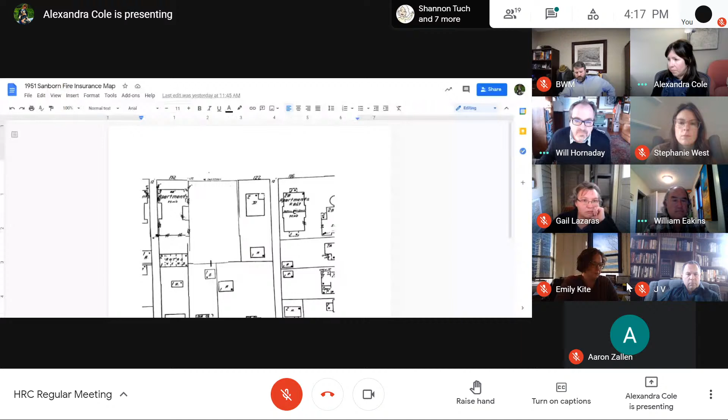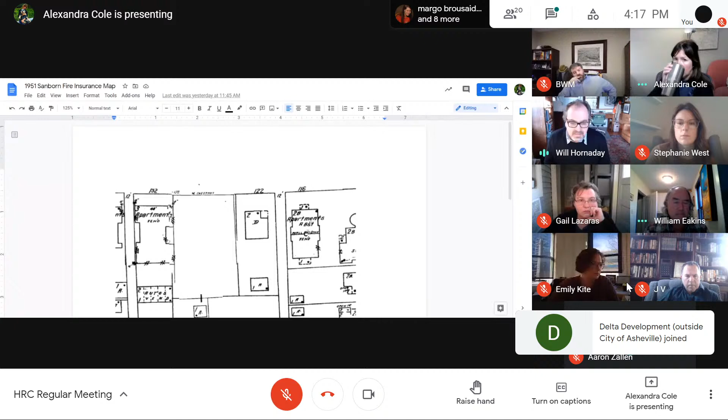Also, last time you had the Sanborn map showing the original location of the ADU and the one-story ADU. Do you have that on this? Yes, I thought I added it to the folder, it might be number 9. I don't think I added it to the presentation since we looked at it last time, but let me pull it up. It's not exactly in the same place, but it looks like the footprint on the Sanborn maps - it's not like they were 100% accurate - but there is that footing in the backyard. Yeah, you can see it. Can you see that, or should I zoom in? Yeah, I see it, okay. And that's about where that footing is in the backyard. Right, okay.

Any other questions? Alex, that perspective photo that you had... Sorry, you wanted to see that again? Is that what you said? Okay.

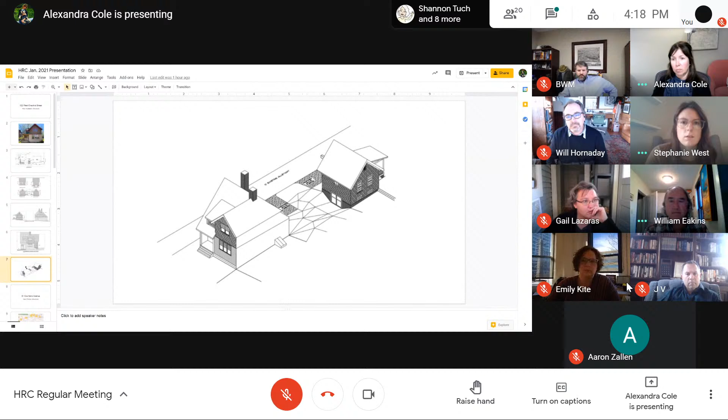Does it say the height of the rear building? I saw it in here. So it's just from the ground level, so 27 feet, but that is not measuring from where you see the doors, where that would be dug out. It's not including that dimension. So I don't know, I'm just eyeballing that - it probably looks like, I don't know, 5 feet maybe, but I'll let Kenny, the applicant, speak to that. Cool, thank you. Sure.

Commissioners, are there other questions for Alex at the moment?

We can get some additional information. I understood the square footage to be 68% or so of the main structure. Was that correct?

Yes, that was based on the property card square footage calculation for the primary structure. When I talked to the applicant earlier in the week, he let me know he had measured the building and said it was closer to 1,600 square feet. That would bring it down a little bit, but still not anywhere close if you're using 30% as a calculation. Based on square footage, it still wouldn't get it close. That's what I was alluding to, making sure the math was not even close with the revised square footage of the house. Yeah, I'll pull out my calculator and do the math for you.

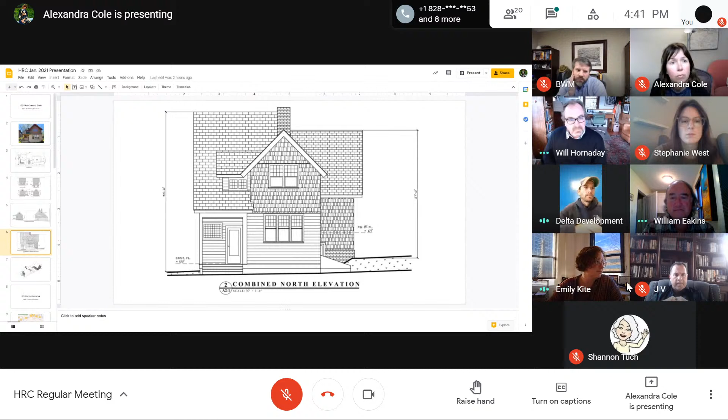Alex, back up to slide 3, please. So that existing - I'm using my cursor, which you can't see. But Alex, could you show where that foundation is? Sorry, I just realized I was muted.

It's a little bit hard to compare side to side. Unfortunately, I wish we were in the North Conference room and I could put these up together. But if you're looking at the Sanborn map, it looks like it's definitely shifted over so that it's fully behind the primary structure, which would probably help a lot.

Kenny, I don't know if that's possible. You would probably have to reconfigure the parking a little bit. Oh sorry, that's okay, we wouldn't have to move the parking. It seems like - if that's what he's saying, towards the alley, then it shouldn't be too much of an issue. It's only a couple feet.

Yeah, it might help it a lot. I do agree with Will, and that was sort of why I pulled this slide up - it is really competing in a big way. If you're looking at how simplified the primary structure is - obviously this is kind of a funky view because you're looking up at the house - but if you're standing in the middle of the street looking straight at this house, you see now the accessory structure extending out beyond the side elevation, and it appears very large.

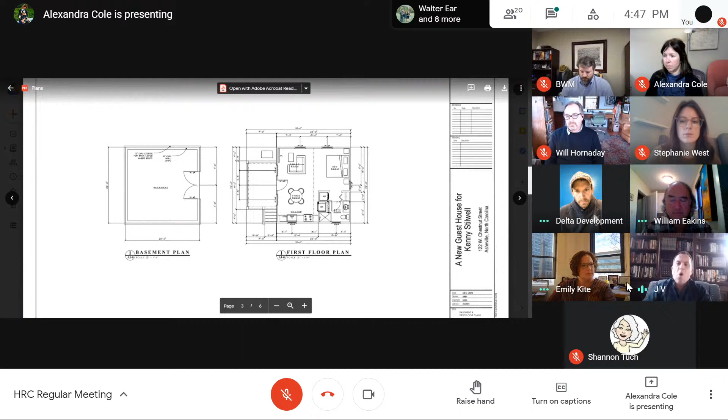If I can ask a quick question, I'm one of the new guys, so Ms. Kite, you'll cut me off if I'm not allowed. What is your intent for the use of the space above ground, not in the basement? I'm gathering, and Will Hornaday helped clarify, the concern seemed to be the height of the building, since the accessory building is seen from the street, and the width. If tucking it behind helps, would you be allowed to expand more underground? Is that what your use space is, or is it just living space where you're obviously wanting sunlight and all this stuff? Helping me get a sense of how you want to use that looks like a living space might help us in deciding things like lowering the roof level and other things that help get to the scale of the building. This is part of my learning curve, so any of the longtime members can jump in and correct me.

Yeah, my intent for the lower portion would just be storage. But the space above ground that we would be seeing from the street and from the alley, it's what we see here — it looks like it's a living structure, a living unit. Yeah, that would be the living space for my friends and family to stay in when they come to visit.

Okay, well that didn't help. Yeah, it's a 1,600 square foot house. I have 2 kids and a wife, and it's enough space for us, but I'm from Michigan, I have family, and I currently live in Florida, so we have people visiting — we'll probably have people visiting from both directions.

So I just want an extra space for people to stay. So the space you're needing, whether it's taller or longer or wider, you're sort of agnostic to, because you're looking for a purpose. Whereas if we can find your purpose and meet the scale concerns that have been expressed, you'd be amenable to that. So it's a matter of saying, can we find the space you need that meets the configuration and confines of what they need?

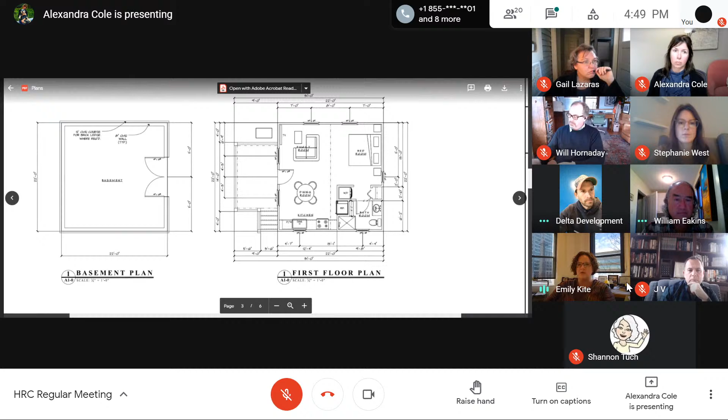I want to talk a little bit about the windows. I think one of my concerns about the windows may go away, Kenny, as you consider an option that puts the basement fully underground. We've got these basement windows along the transition between the brick and the siding, and I don't see that as a detail coming through from the main house — it starts to read taller for me, and doesn't do much to mask the fact that there's a basement, in terms of the scale and massing of the house.

I think maybe that problem solves itself if you propose that the basement push into the ground a little bit, because I don't see those same windows showing up on the main structure, and it starts to suggest a multi-story building, which leaps to a bigger mass when we're looking at multi-story structures. So I think you might give some consideration to how important those windows are and whether they're really consistent with the house.

I know, Alex, you had some other concerns about the windows and how we could better connect the style of the windows from the main house with this structure. It's not really a house, but I'd be interested in making sure that, Kenny, you get the feedback from us that you're looking for with regards to windows and some suggestions about how we might feel if other window configurations might be proposed moving forward.

Definitely to that. My only other concern would be egress. I don't know what windows would be necessary in the basement, maybe if they're below grade and you can't see them, with a window well or something. I wouldn't think you'd want to lose them all. I think you'd want to have some form of egress.

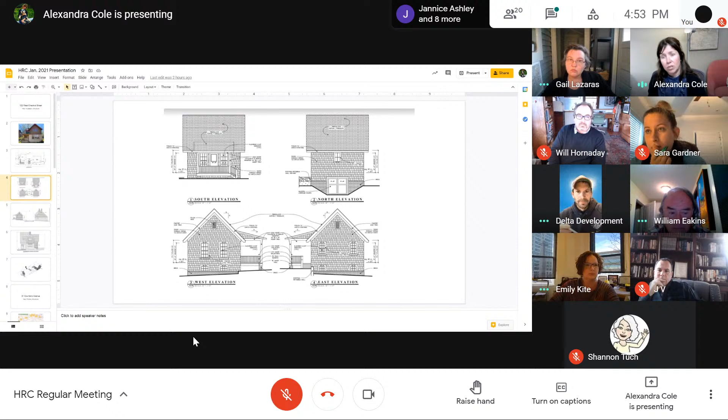We could make it a condition on the approval, Kenny, that you follow up with staff once you've decided on the paint palette. I would mention that the resubmittal deadline is next Wednesday, so it's a pretty quick turnaround. I don't know if you can get it together between now and next Wednesday, but great.

We'll welcome you at the February meeting, but if you feel like you need more time, you might want to consider March. Just throwing that out there. Okay, and can I notify you this Friday or Monday about that if I need an extension? Yeah, that's okay. If you don't know today, we'll just have you request to continue to February, and then we can follow up if you need to change it to March.

Okay, and just real quick, I want to revisit the porch just one more time, if we could. If we take away the posts and handrails and things like that, and just maybe do like a bracketed roof over, would that be more pleasing for the commission?

From my perspective, I think anything that reduces the scale of it and sort of downplays the focus of it is certainly worth considering. I could appreciate the need for a covered entry, and I think anything that can happen that sort of minimizes that roof line and the footprint and the scale of it is certainly going to improve the overall massing of the structure itself. Okay, all right, thank you.

Gail, you've got comments? I do have kind of a comment/question for my fellow commissioners. So looking at the standards under carriage houses, garages, and accessory structures, the bottom line is that the overall feeling of those accessory structures is that they're modest and take second fiddle to the home, clearly. I just wanted to ask the architects on the group or anybody else that has an opinion. I understand that the large high pitch roof, the intent was to echo the front building, the main building. What are your thoughts on lowering that pitch, on making it so that it doesn't echo that front building? Because to me, that's a huge part of that visual hit from the street. I was just curious what you all felt about that.

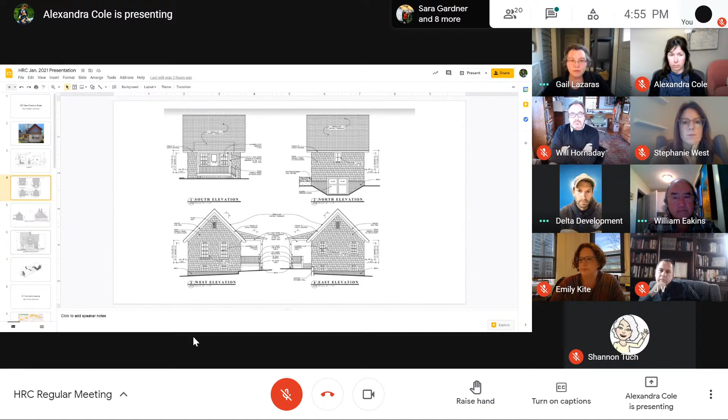I think from my perspective, it'd be an interesting study to do. I think it's going to be a bigger distraction visually if the pitch is different, that's the challenge. And if the constant is matching the pitch of the roof, the only solution to shorten is either make it narrower. The proportion right now is square.

A rectangular proportion, which I think is more in line with the Sanborn footprint, would also bring the ridge of that roof line down if it weren't as square a footprint as it is now. That's one strategy. Lowering the bearing line of the eaves is an option, but at that point you get to a place where the ceilings start to become unmanageable.

So I think it would be potentially more distracting in terms of congruity with the main structure if the pitch was different. But I think there are some geometry things that could be considered that might help without giving much up in terms of square footage, because that's not the only metric we use to evaluate, that could reduce the overall height of the structure in comparison to the existing house.

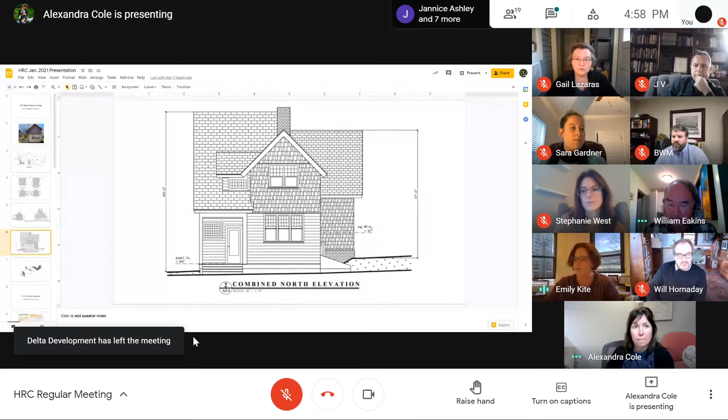And we are in the agenda moving forward to items of new business. Alex, do we need to entertain a motion to continue the 250 Montford Avenue application?

Yes. Okay, I move we continue 250 Montford Avenue to the February 10, 2021 meeting. Thank you. Second, Mitchell. And that was Commissioner Mitchell on the second on that. Correct. Okay, we'll vote again by roll call.

Vice Chair Eakins, aye. Commissioner Brusades, aye. Commissioner Gardner, aye. Commissioner Hornaday, aye. Commissioner Lazaras, aye. Commissioner Mitchell, aye. Commissioner West, aye. Commissioner Vaughn, aye. Myself, aye as well. That motion also carries.

Moving on to the next application, 81 Courtland Avenue, also in the Montford Historic District. I'm going to let Alex get us all up to speed on this application. Thank you, Chair Kite. So this application is for construction of a new primary structure on Courtland Avenue.

I included a site map just to orient everyone. These lots were newly subdivided last year, I believe, one of the first subdivisions the commission considered. So these lots are a little bit tricky because they're kind of in this, you can see, it's a little bit of a bowl. If you've driven around from Houston Street around on Courtland, you can see down into this property.

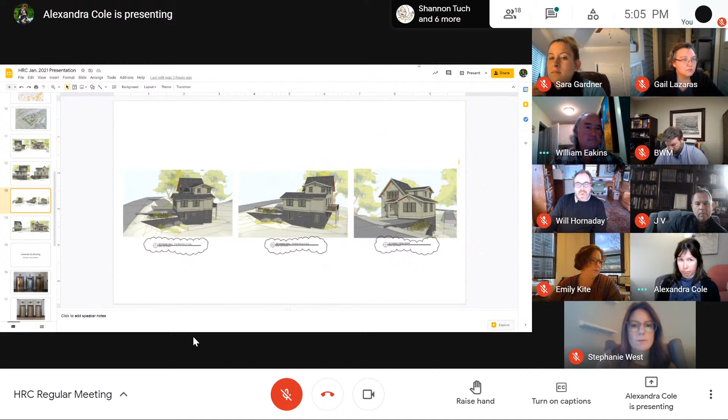Alex, the correct square footage is 2765? 2701, thanks. Sure, it got reduced a little bit obviously with that reduction of the length of the L. So to change that around, hopefully I got everything right. I was making a lot of last minute changes today.

Are there other questions at this time for Alex?

Okay, at this point I'm going to invite the applicant to provide any additional information you'd like the commission to consider. Mr. Zallen, I presume you're here. I am, thank you, hi everyone. Can everybody hear me okay? Yes, great.

So is the floor open just to make commentary, or do you want to solicit questions first, or how would you like to proceed? If there's anything you'd like to add, we can respond with questions at this point. But if there's anything in response to things Alex has mentioned, or anything you'd like us to know before we dive into questions, that would be appropriate. Okay, that'd be great, thank you.

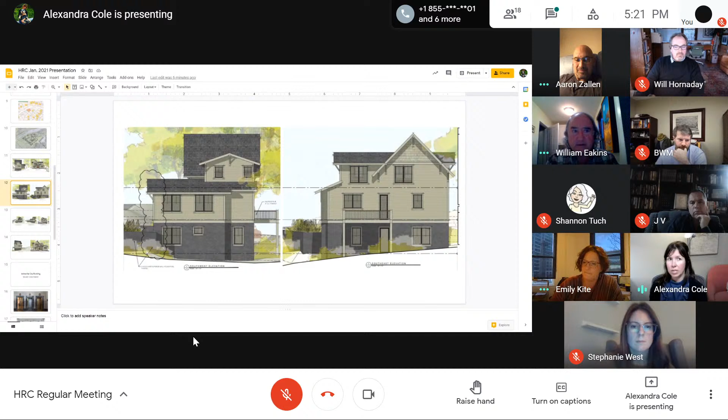Hey Alex, what are the square footages of the neighboring houses to this property? There's not anything around this house. There's this little one at 4 Houston Street, a non-contributing structure. I can pull up the property card for that one, but it's a little one-story, not a ranch, but kind of between a cottage and a ranch. This is outside of the district once you go farther southwest on Courtland, so there's not really any kind of context to tie it to from a square footage standpoint.

I didn't think in terms of the overall square footage that it was inappropriate, especially because of the way it was designed from the street perspective level. It's not overwhelming from the front elevation. It is pretty big, and it does have that finished basement if you're looking at it from the rear, which you will see from Houston Street until these other lots are built on. But from my point of view, it seems like a sympathetic addition in the neighborhood, in that fringe area, knowing that area of the neighborhood pretty well.

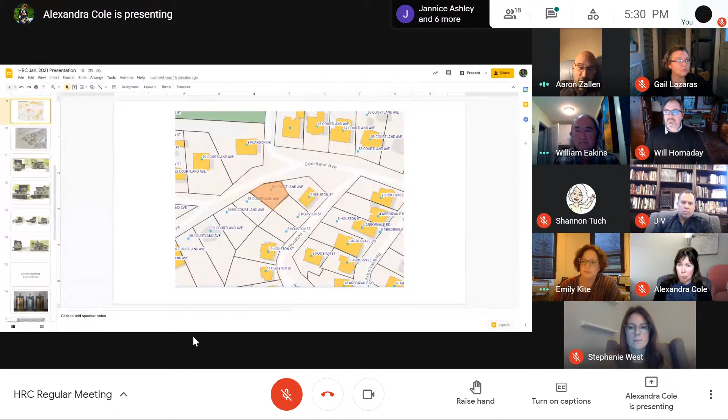The upper part of the lot is where we originally decided to move, which would have put the parking on the side of the lower end, where the existing structure is, on the lower side of Houston. It was so steep and untenable that you couldn't even do it. So I had to move the building to the opposite side, which makes the foundation a little more untenable. It's sort of like pushing on a balloon—you push one side and something else pops out the other side.

So we've endeavored to put the parking on the upper side, towards the confluence of Courtland and Houston, on the other side of that lot. We've succeeded in doing that while minimizing a retaining wall, which would be probably a couple feet. That's at least the preliminary plan as it exists today, just to give you some perspective.

I think the feedback we've heard regarding the parking is consideration of using other materials to make it less impervious and soften it to some extent. There's been one suggestion for abandoning the front yard parking in favor of on-street parking on Courtland as a way to meet the guidelines. We've not heard a great deal of support for leaving the parking how it is.

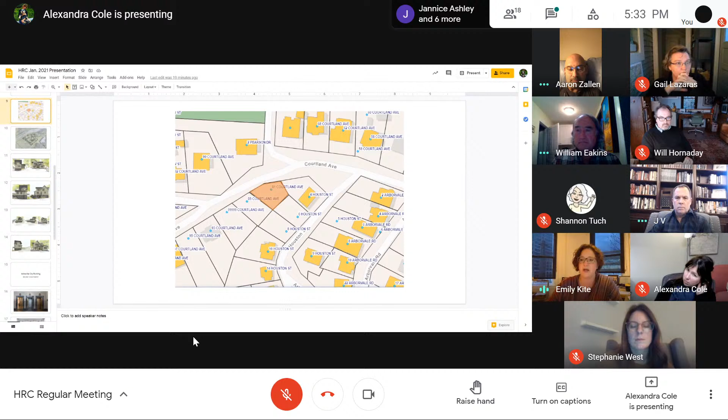We've also not really talked about the massing of the house, or the style or look of the house. Gail, I appreciate your description of that—I do think it's a nice solution. I like the scale of the front of the house, that it's not quite as big as it appears from the back. I think the scale is appropriate in the front for the district, and as a design solution, the house is a pretty good one. I don't have particular concerns about that. So, as with many applications, it comes down to the parking, which probably, Aaron, was not a particular surprise when you came here. No.

Yeah, I want to be as accommodating, obviously, as possible, and I understand the concern. It's a very gray area, a transition area between what you consider proper and not. So I'm really cognizant of that and mindful of that.

I think at this point, the options for you are to amend your application today to reflect some of the changes we've suggested. I don't know that the commission's given us a strong sense of one solution over the other. The other option would be to request a continuance and give yourself and your designer some opportunity to consider in more detail some of the feedback you've gotten today and come back with a proposed change to the solution you've presented.

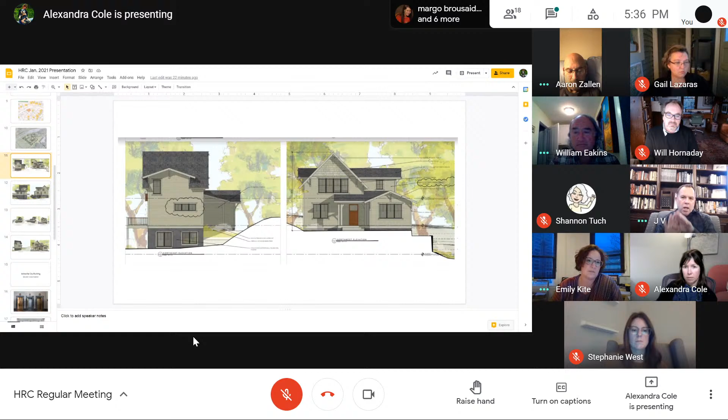And I understand we don't want to park along here, and then you try to get trucks through, try to get other cars - it is a nightmare on Childs Avenue. So my soapbox is always going to be, when it comes to off-street parking, take into consideration the neighbors and the other people who have to try and get through these neighborhoods. Off my soapbox. Thanks.

One solution that people in that vicinity use, and other places in Asheville, is more like a street widening, where the cars are still parked on the side of the road, but on the property, on the right of way, sort of, that's created. If you go further down that street, you can see where other folks have used that, which is a bit of a compromise between a full pull-in straight driveway that takes up the whole front yard, and a way to minimize that wide appearance in the front of the building as part of the entry. I don't know, it's just a thought I had - not sure if it would actually work.

I would be open to that as well. It looks like the one Alex has up now creates almost like an extended apron, though, that goes almost the length of the house.

So I would just add, going back to what Shannon said, parking isn't allowed in the front setback - I'm not sure how that was created, so that actually isn't an option. Right now you're cutting it close. We did send your site plan to our development services staff to see whether they could approve this from a zoning perspective, and I think it would probably be okay, but pretty close to what they would not allow. So I don't think they would let you do what Gail is describing, although I'm sure there are plenty of places where that exists, where it just didn't get an approval or is old and has been there for a while.

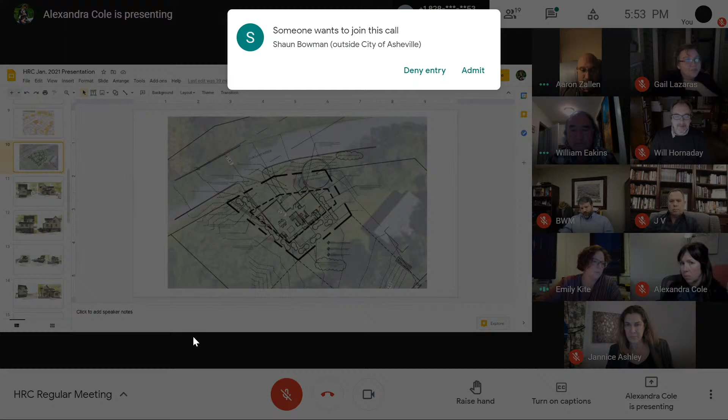In that location with that topography, with appropriate landscaping that might mitigate the visibility of the retaining wall and so on, it would certainly be something I'd consider. Okay, strongly.

The conversation with Aaron Zallen, the architect, was that the retaining wall would be quite high, on the order of 10 feet potentially. Obviously you need to be careful with the pitch of the actual driveway itself to try to reduce that retaining wall — nothing over a 20 pitch, because it does slope down, and we know what happens when you get ice or any type of freezing and it slopes down — you end up in the yard.

One last perspective: I would feel comfortable approving on-street only parking and handling this, just for traffic calming, and also bringing this to a head to let the neighbors get involved and know what they think. I don't know, Aaron, if you've spoken with any of your neighbors about this plan, but I'm looking ahead — like Chair Kite was saying about these other Cumberland Circle situations, exactly the same thing, where there's a split-up lot with a very steep drop off the road, and it's going to be really hard to park on it. So I would be fine with on-street parking as this is shown now.

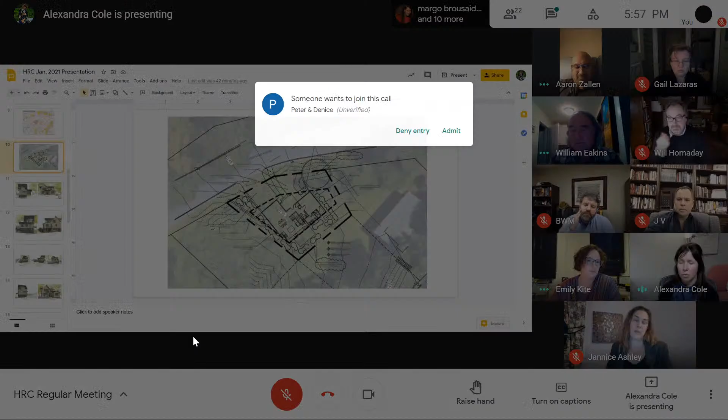I want to go back to a comment you made, Will, about talking with the neighbors. We notice all properties within 200 feet of a subject property for major works, as required by state statute, so all neighbors should have received notice and a link to view plans online. I haven't heard any comments or concerns from neighbors about the proposal, but to be fair, Alex, there is parking shown on the site, and they'd be more concerned if there were only on-street parking.

I've worked with multiple folks around Arborvale, Houston, and Cortland. Generally that area is very tricky with parking, especially at Arborvale. If you go through there, it's one way, but even being one way is a little dodgy, especially from a life safety perspective. So I could see that even if you allow at least one parking space, that's one less car that has to park on the street. I think it's worth the applicant considering some of the suggestions made today that might work, and then seeing what you all think about the solution they arrive upon.

Because I do agree with Jannice, I think that's why the provision in the guidelines exists for when a site has limitations like the steepness of the topography - that's obviously why the guideline was created. So I think you should consider it. It's not ideal, but it's also on the edge of the district, as you all said. It's not in an area where it would obscure other architectural or landscape features. I feel like I could support parking there if it were on the other side, or at least minimized on the southwest side to the extent possible.

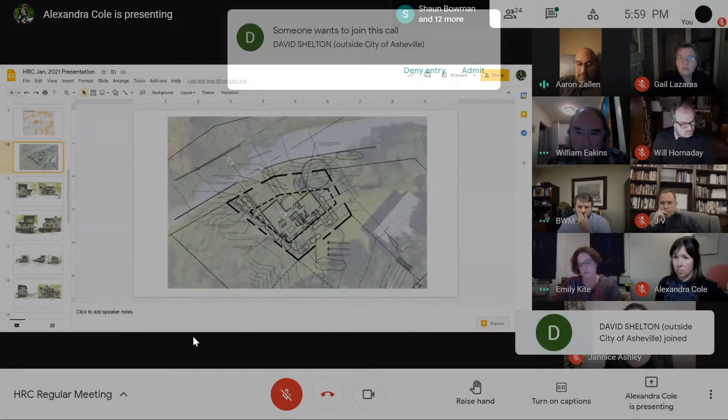I think, Aaron, at this point if you're inclined to consider Alex's suggestion to continue the project, that would be something you'd request from us, and then we'd make a motion around that request. Yeah, absolutely. I understand this is potentially a broader issue than this one property, and I'm sensitive to that, and I understand the precedent nature of it. There are varying opinions and views. I think continuing a month would give the commission time to think about it independently, and when we come back we might have a bifurcated approach that works better. The suggestions everybody made were good ones, so carrying those back and continuing would be something I'd be amenable to.

So are we going to March with this application, or February, sir? I'm sorry, I misheard you. Are you asking to come back in March or February? Oh, February for sure. Alex, what was the deadline for the February meeting? The deadline for resubmittal is next Wednesday. So we have one week, Aaron? That should be plenty, that should be enough time.

Okay, then I move that we continue the 81 Cortlandt Avenue application to the February 10th, 2021 meeting. Second, Mitchell. Roll call vote on this motion. Vice Chair Eakins, aye. Commissioner Mercedes, aye. Commissioner Gardner, aye. Commissioner Hornaday, aye. Commissioner Lazaras, aye. Commissioner Mitchell, aye. Commissioner West, aye. Commissioner Vaughn, aye. Myself, aye as well. That motion carries, and Aaron, we look forward to seeing you again next month.

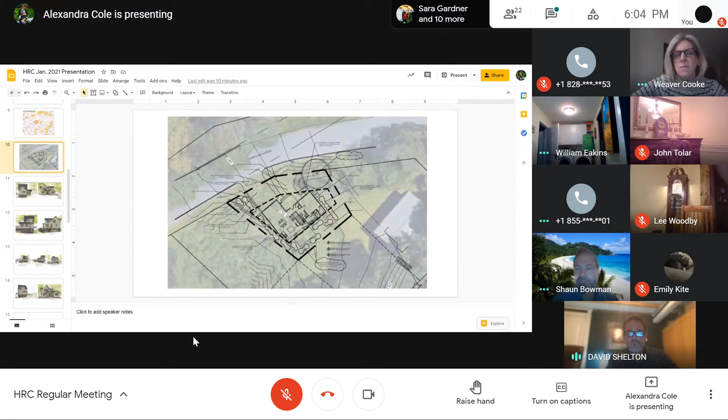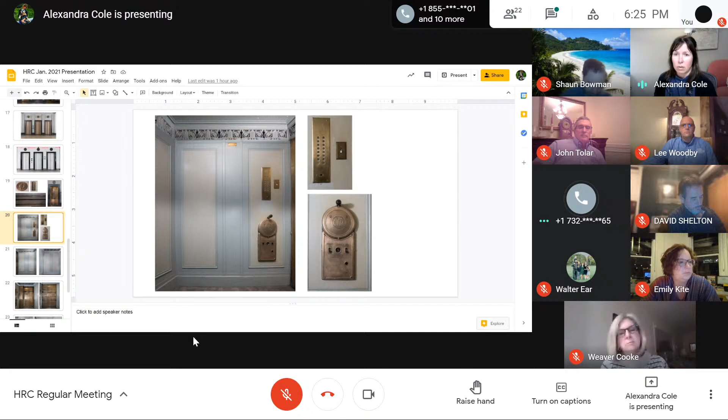So I think if that is somewhat unknown, we need to make sure all of that is verified with staff when it is known, as far as the dimension, how the venting will be cut, and whether there will be a seam here or what that will look like appearance-wise. So I've just included more shots of the interior of the cabs.

The other big change, which is kind of what we suspected, is that the brass gates unfortunately can't be used and meet ADA compliance. We are recommending that, I've noted it as a concern, but at the end of the day, if the commission is comfortable approving an elevator modernization, it's going to come with some small compromises. Given the amount of other features they're able to retain and preserve, I think we kind of have to give a little.

I would add too that I did reach out to the SHPO staff, to Jennifer Cathy, the restoration specialist with their office, to get her courtesy review on the application. She had the same feedback that I did, that overall, if this were a rehabilitation project, the changes being proposed would be acceptable and meet the Secretary of the Interior standards. So I was pleased to get that feedback from her.

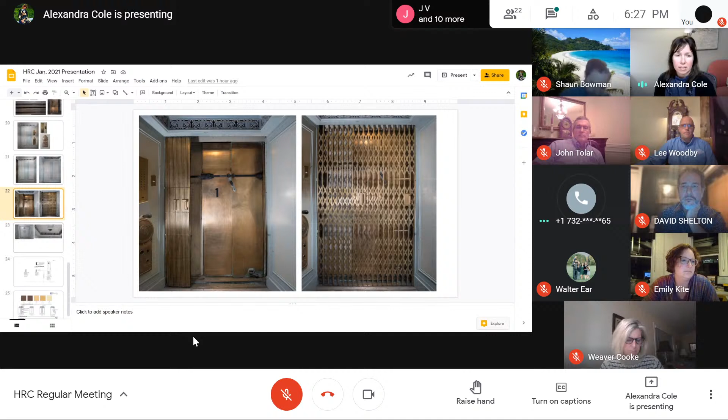I think one of the things we should probably consider today is, if the gates are removed, where do they go? What do we do with them? Surely we don't want them to get lost in some city facility somewhere without some kind of second life. I don't have any great ideas today, but I can ponder it. If you all have any thoughts, I'd be open to them. I know the Capital Projects Department has talked about updating some space on the first floor to perhaps have a newer, updated museum space of some kind, which might be a good place for the gates.

So just a couple of other pictures. The ceiling, this will all be retained, restored, and cleaned up. I just included this little detailed drawing of the dimensions.

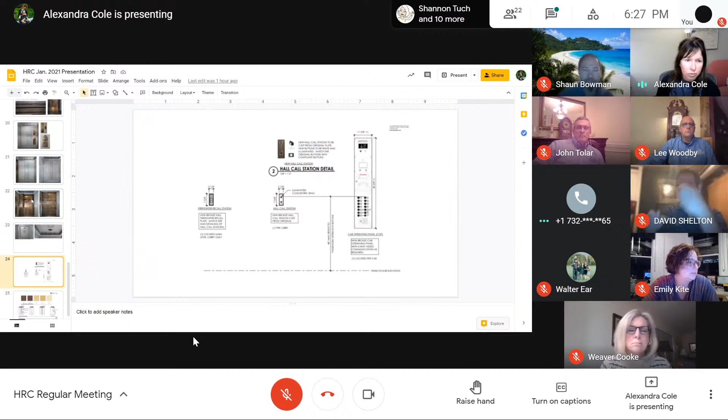That's the other big thing you will notice, is that on the wall here, as you're facing the doors, there will be a new car operating panel. The dimensions of that are estimated here but not known specifically, so I think we would just need to verify that in the field once it is known. But that is how the elevators would be operated.

If you want to read through it, it's in the packet. But ultimately, these were the colors that they considered to be most closely matching the original colors of the elevator cab.

This project also includes repainting the cab interiors, as well as installing new marmoleum or linoleum flooring, which it has now, and that was typical of elevators of this era. At this point the architect has sent me several different types of linoleum and colors, so I think it's just kind of up to this group to make the determination on what the appropriate color for the flooring is.

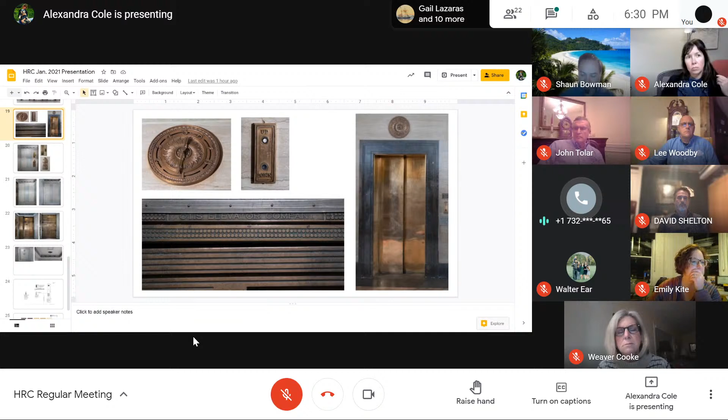If you'd like, I can give you a brief idea of our idea of the decorative venting and how that will change. The idea is essentially finding the right point to remove it, probably doing it symmetrically, so the symmetry still makes sense, but likely just a little off of each end, so the pattern makes good sense.

The new operating panel - the drawing that I have up there would probably be elaborated similarly to the call stations with a small brass border or something to make it sort of fit in. And the intent on what I actually like about the location is retaining everything that was existing, but then the new door wall, essentially, it's there. So what is new houses that, so I think it detracts less from what was there. That's all I wanted to say.

Commissioners, do y'all have any additional questions for Alex at the moment?

Alex, you had said there was a picture of the mail slot. Is that coming out, or why was that in the packet? I think the applicant or the city staff shared with me a packet of photos that were taken at some point, and I'll let Walter Ear from our Capital Projects Department address that. Walter, I was thinking that photo was just in that packet of images, like it's context for original features down there. Is that correct?

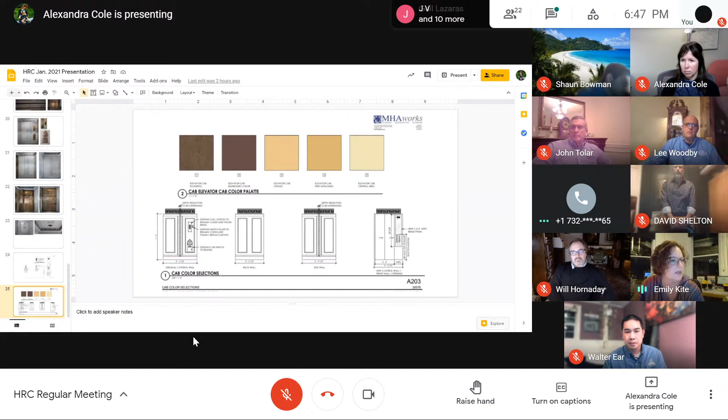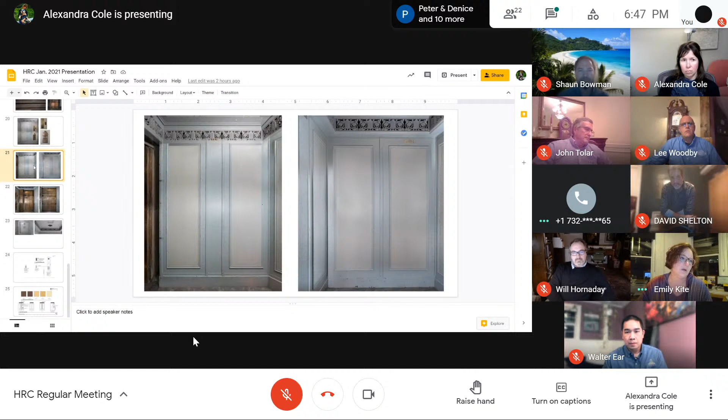Peter, I had one more question, I'm still a little unclear on what's happening with the vented screen at the top of the elevator cabs. Right, so as we discussed, the length of it needs to change a little to coordinate with the size of the car, and it's a domino effect, it all relates to the door placement, etc.

My intent would be to shorten it so that it ends up with a symmetrical design. If you take a look at the design, the scroll work essentially would be the same at each end. That's my gut reaction, it's the best way to do it. If that is done properly, I think it would be very difficult to even tell that it's been done. But the reason is to coordinate with a slight change in the dimension of the cab.

That was the piece I was missing, the cab is changing sizes. Right, yeah, and of course we're trying to keep, obviously, we're trying not to do anything we don't have to do, so that it retains it all. But some of these are just the reality of the project, unfortunately. So we think we can do that in such a way that it is very difficult to even tell. If you look up there the first time, you wouldn't know.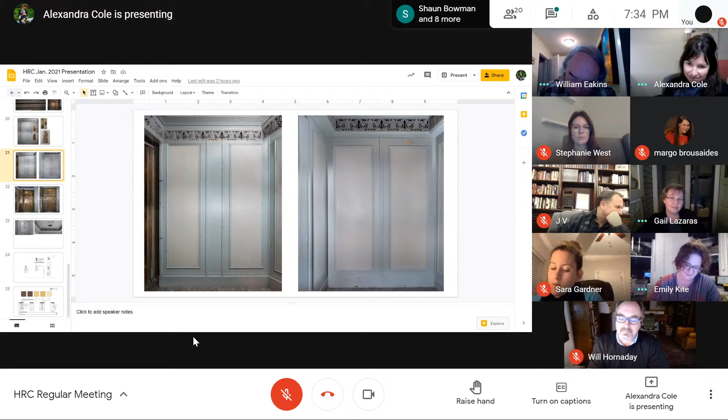Okay, so I guess the condition about the documentation - and really, well, I wrote down, I think, what I wrote down, so edit me as I go - that the city staff will ensure that this elevator and related system be documented and memorialized. I don't know if you want to say memorialize the elevator experience, to have some idea of the action or not, but nevertheless memorialized for public benefit. Excellent, okay.

And then we have a condition as to color, that staff will confirm flooring color with the applicant.

Okay, is there anything else? There was the 4-inch measurement of the cab width, right? Right, the dimensions of the cab of the sidewall widths, and the dimensions of the COP will be verified by the applicant and approved by staff. Any other conditions? Okay.